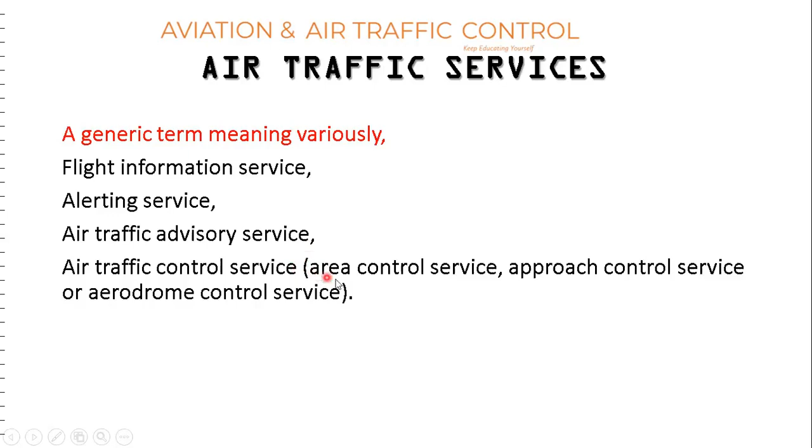This lecture is about air traffic services theory. So air traffic services is a generic term which means variously flight information service, alerting service, air traffic advisory service, air traffic control service. Air traffic control service includes area control service, approach control service, or aerodrome control service.

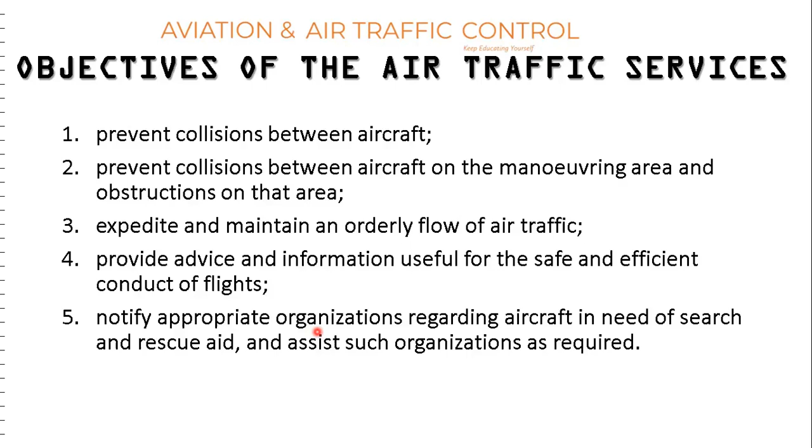So objectives of air traffic services are 5. First is prevent collision between aircraft. Second, prevent collision between aircraft on the maneuvering area and obstructions on that area. Third, expedite and maintain an orderly flow of air traffic. Fourth, provide advice and information useful for safe and efficient conduct of flights. Fifth, notify appropriate organizations regarding aircraft in need of search and rescue aid and assist such organizations as required. So these are 5 objectives of air traffic services.

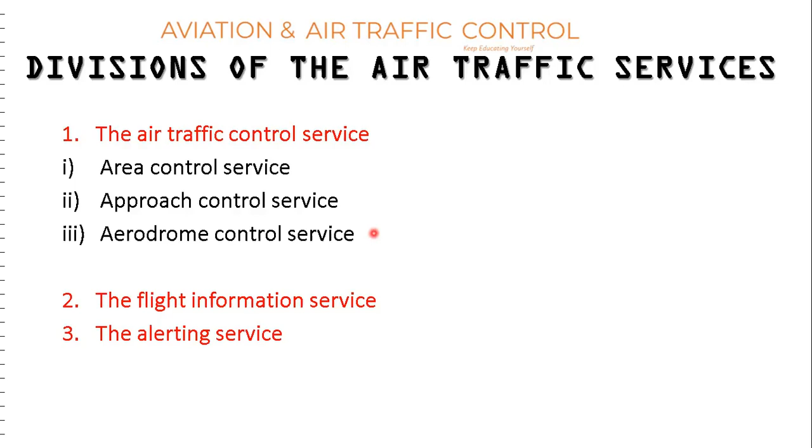So divisions of air traffic services, this is divided into 3. First is the air traffic control service. Air traffic control services are further divided into 3: area control service, approach control service, and aerodrome control service. Then the second division of air traffic services is the flight information service, and the third one is the alerting service.

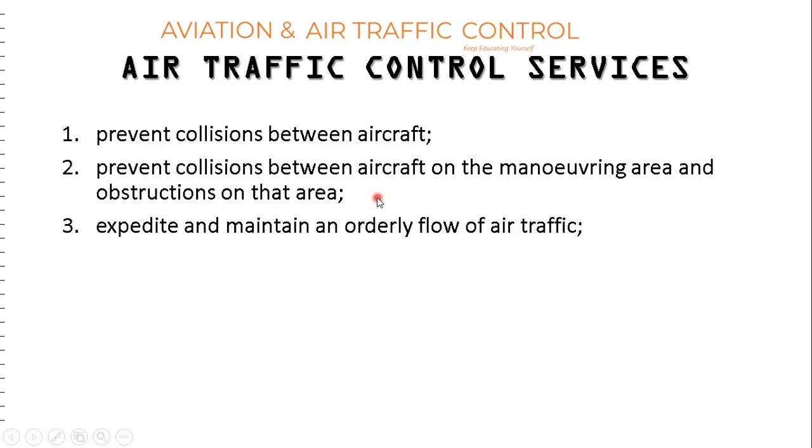So air traffic control service will prevent collision between aircraft. This is their objective. Prevent collision between aircraft on the maneuvering area and obstructions on that area. Expedite and maintain an orderly flow of air traffic. Flight information service will provide advice and information useful for the safe and efficient conduct of flights. Alerting service will notify appropriate organizations regarding aircraft in need of search and rescue aid and assist such organizations as required.

Flight information regions: those portions of the airspace where flight information service and alerting service will be provided shall be designated as FIRs. Control areas and control zones: those portions of the airspace where air traffic control service will be provided to IFR flights shall be designated as control areas or control zones. So here we have spoken about IFR flights. Now we will discuss the VFR flights.

Those portions of controlled airspace wherein it is determined that air traffic control service will also be provided to VFR flights shall be designated as class B, C, or D airspace. Controlled aerodromes: those aerodromes where air traffic control service will be provided to aerodrome traffic shall be designated as controlled aerodromes.

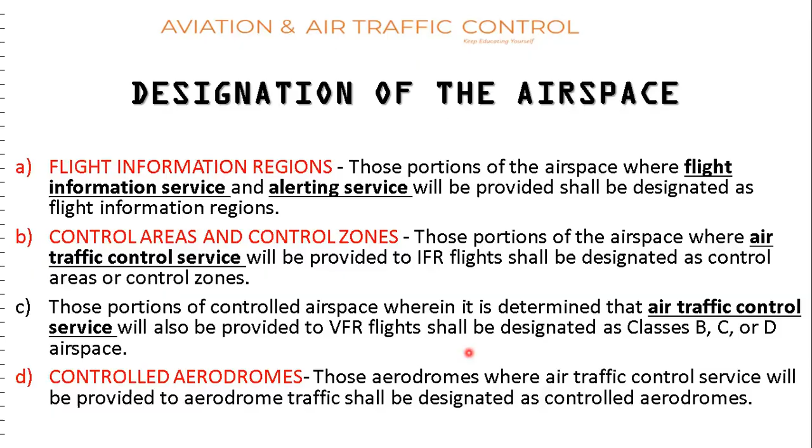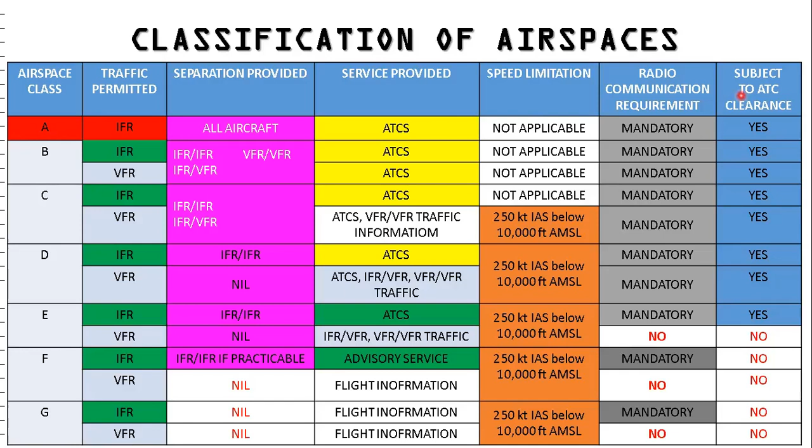Now, this is the classification of airspace. Classification of airspace as per ICAO has been done in 7 classes, A to G. It is further classified based upon traffic permitted, separation provided, services like air traffic control service, traffic information or alerting advisory service, then speed limitation, radio communication requirement, and whether these flights are subject to ATC clearance in a particular airspace or not. For this, you can refer to our separate video.

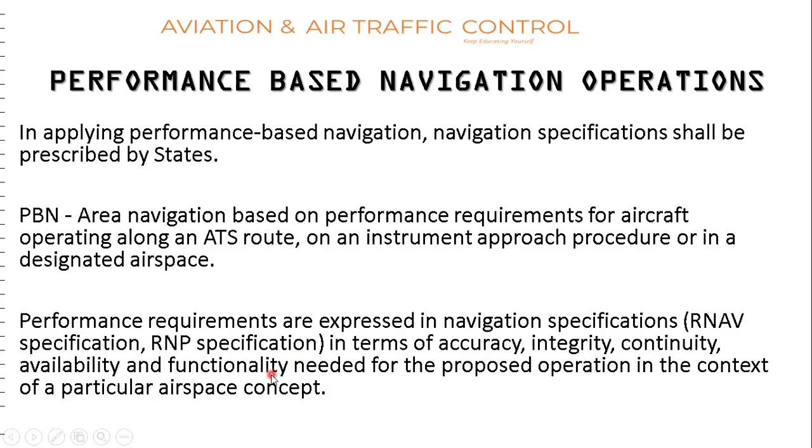Now, performance-based navigation operation. Every state has to prescribe what performance-based navigation they are utilizing in their airspace. So what is PBN? PBN is area navigation based on performance requirements for aircraft operating along an ATS route, on an instrument approach, or in a designated airspace. Performance requirements are expressed in navigation specifications. These are of 2 types, RNAV specifications and RNP specifications. Performance should be described in terms of accuracy, integrity, continuity, availability, and functionality for a particular airspace concept.

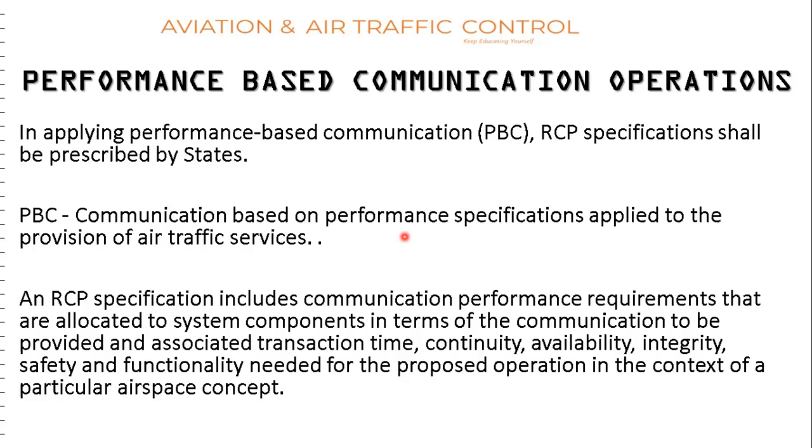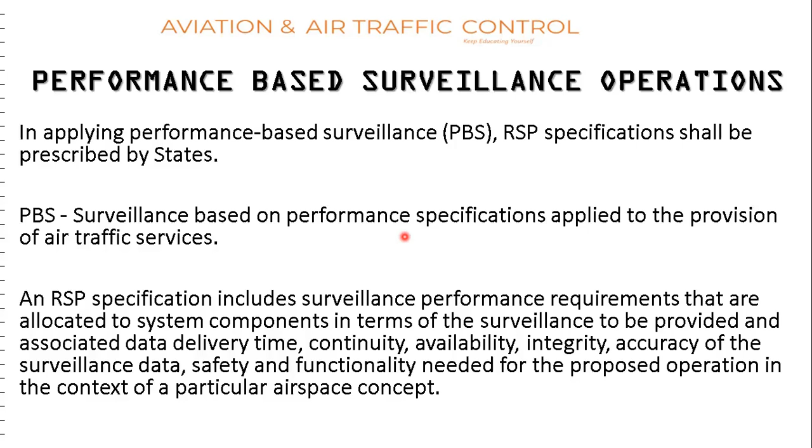Then performance-based surveillance operations. In applying performance-based surveillance, RSP specifications shall be prescribed by states. So what is performance-based surveillance? This is surveillance based on performance specifications applied to the provision of air traffic services. And required surveillance performance specifications include surveillance performance requirements that are allocated to system components in terms of the surveillance to be provided and associated data delivery time. In communication it was transaction time; here it is data delivery time. Thereafter, continuity, availability, integrity, accuracy of surveillance data, safety and functionality needed for the proposed operation in the context of a particular airspace concept.

Designation of the units providing air traffic services. First is flight information center. Second is area control center. Third is approach control center. Fourth is aerodrome control tower. Aerodrome control is further divided into three parts: aerodrome control tower, ground control, and clearance delivery.

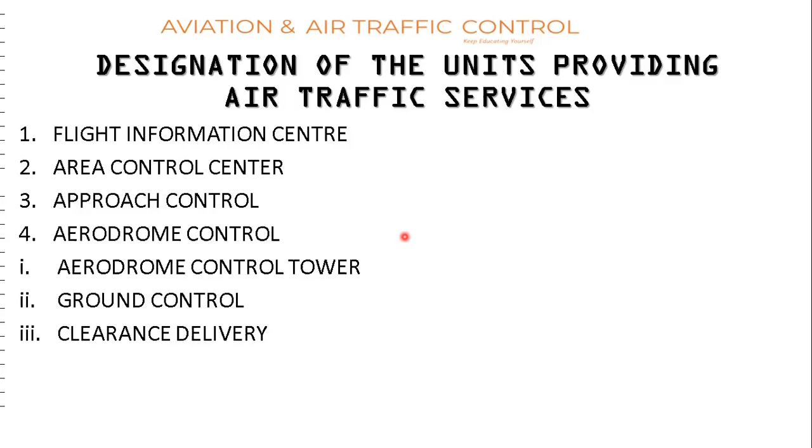Specification for flight information regions. So FIR is an airspace of defined dimension within which flight information service and alerting services are provided. Flight information regions shall be delineated to cover the whole of the air route structure to be served by such regions within its lateral and vertical limits.

Where FIR is limited by an upper FIR, the lower limit specified for the upper FIR shall constitute the upper vertical limit of the FIR. It means that both levels, the upper limit of the lower FIR and the lower limit of the upper FIR, should coincide. And those shall coincide with a VFR cruising level.

So suppose lower FIR is up to 245, it's a lower FIR. So upper FIR will start from 245 and above. So here, up to 245, one unit is responsible, and above that the upper FIR is responsible. And when we will be allocating levels, no 500 feet levels will be allocated to anyone.

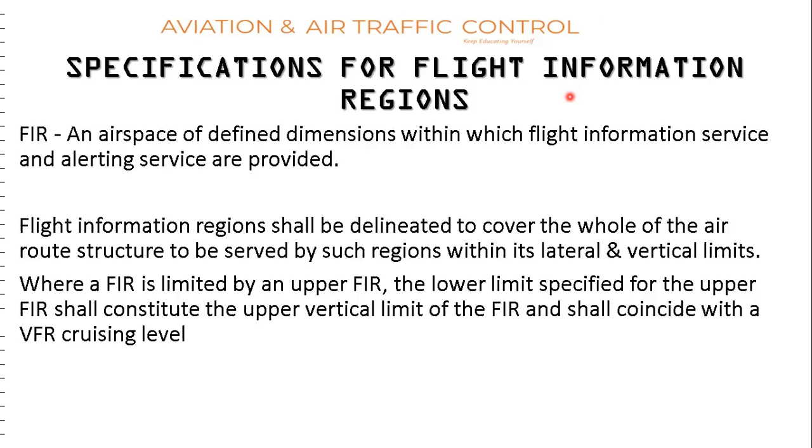We will be allocating like 200, 210, 220, 230, 240. So up to 240, it will be the responsibility of lower FIR. And 250, 260, 270 will automatically come into the jurisdiction of upper FIR. So in these cases, the lower limit of the upper FIR and the upper vertical limit of the lower FIR shall coincide. And that should coincide with a VFR cruising level. So this is a pictorial view of all the FIRs.

Specification for control area. So if we are talking about control area, first of all, we have to understand what exactly it is. It is a controlled airspace extending upward from a specified limit above the earth. So it means it is not starting from ground. It is somewhere above the earth. It is desired to protect the IFR flights. So control areas are basically to protect the IFR flights which are subject to the provision of air traffic control services.

So one thing we have understood from the definition is that it will not start from the ground. From ground, what will start? That is control zone, which we will discuss next. So here, what should be the lower limit of control area? If we have to establish a control area, there will be a lower limit and an upper limit. A lower limit of a control area shall be established at a height above the ground or water of not less than 700 feet. So it should be at least 700 feet or above.

And when the lower limit of a control area is above 3000 feet mean sea level, it should coincide with a VFR cruising level. So suppose if it is above 3000 feet, you have to give the lower limit like 3500 feet, 5500 feet, 6500 feet, 75, 85, 95. So these levels will be the lower limit of control areas. The lower limit of a control area should, when practicable and desirable, be set so that VFR flights have a freedom to operate below this control area.

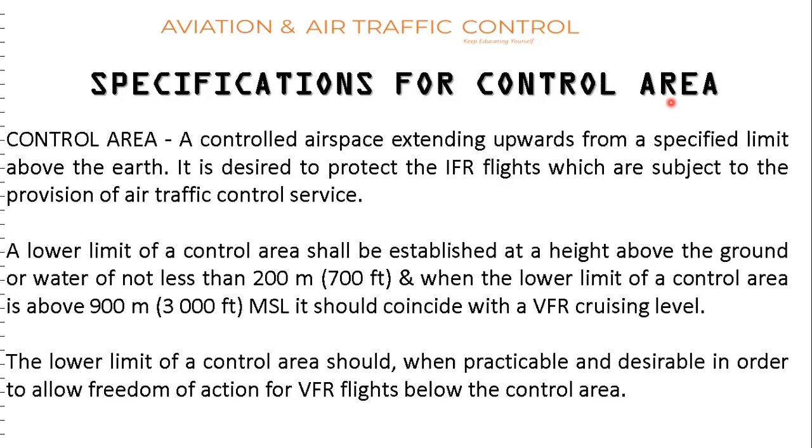Now, control zone. We have already understood control area, which starts from a certain height not less than 700 feet. Control zone is a controlled airspace extending upwards from the surface of the earth to a specified upper limit. The lateral limits of control zone shall encompass at least those portions of the airspace which are not within control areas and containing the paths of IFR flights arriving at and departing from aerodromes to be used under IMC. So it will protect the flights operating near an aerodrome from VFR flights.

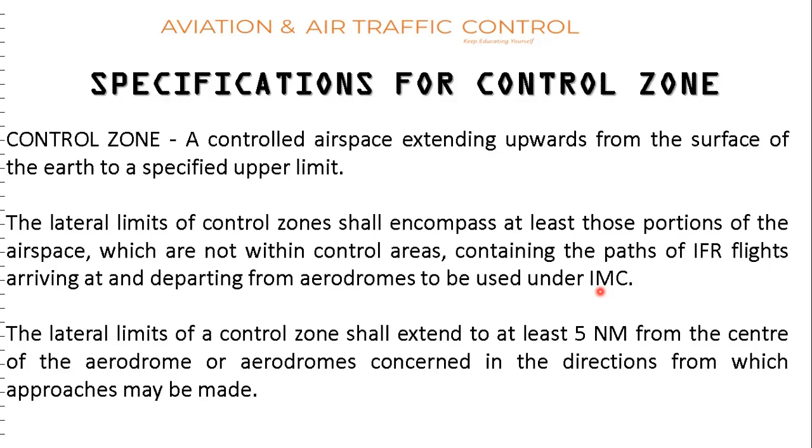So what should be the lateral limits of control zone? Minimum should be 5 nautical miles. It should not be less than this, from the center of the aerodrome or aerodromes concerned in the direction from which approaches may be made. So minimum 5 nautical mile lateral limit of control zone is mandatory.

Now, if a control zone is located within the lateral limits of a control area, lower will be control zone, upper will be control area. So it shall extend upwards from the surface of the earth, and up to the lower limit of the control area. Again, as we discussed earlier, as per Appendix 3 to Annex 2, if this limit is 3000 feet mean sea level or above, we have to use VFR cruising levels for this upper level.

So suppose from ground to 5500 feet we have a control zone. 5500 is above 3000 feet and is a VFR level. So we will make the VFR level allocation for the upper limit of control zone, and from 5500 feet and above, the control area will start. If it is desired to establish the upper limit of a control zone at a level higher than the lower limit of a control area established above it, or if the control zone is located outside the lateral limits of a control area, its upper limit should be established at a level which can easily be identified by pilots.

So it is saying that there should be no ambiguity. Pilot should be aware of it, that here the control zone is starting. So there is one more interesting fact which you will get from the definition of the control zone. If we are talking about the control zones, the QNH below transition level, when it will be going to descend and it will be going to set QNH, so it is applicable in control zones only.

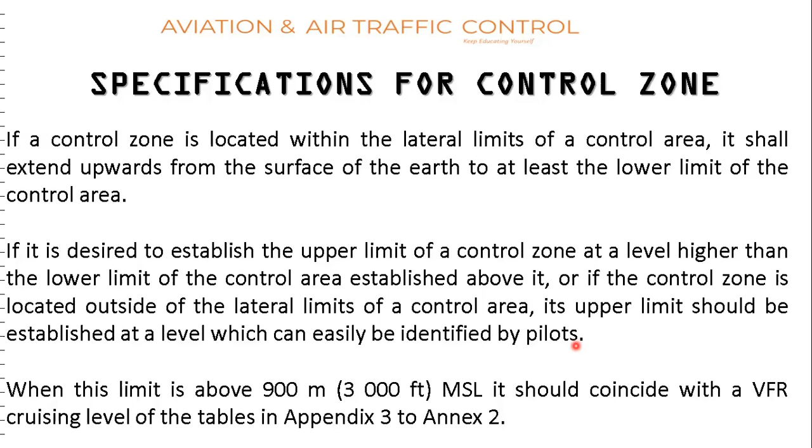And control zones, sometimes they are making it 25 nautical miles, sometimes they are making it 30 nautical miles. But the minimum should be 5 nautical miles from the center of the aerodrome or from the direction of the approach. So this is the main purpose. Control zone is to protect, like all your instrument approaches will be a part of control zone, or your holdings over the facility which is going to provide you aid for landing or departure will be contained in this one. SIDs and STARs will also be a part of this one.

Now, identification of air traffic service units and airspace. So how you will identify in which airspace you are and which air traffic service unit is operating in that one. So here it has been given like this. An area control center or flight information center should be identified by the name of a nearby town or city or geographic feature. So if you are going towards any particular airport, like this is Bangalore area, or this is Kolkata flight information region. So like this, they have to specify. So it will be easy for the pilot to identify at which area control center they are, in which airspace they are operating.

An aerodrome control tower or approach control unit should be identified by the name of the aerodrome at which it is located, London Tower, Heathrow Tower, like this. A control zone, control area or flight information region should be identified by the name of the unit having jurisdiction over such airspace. So it's just for the identification.

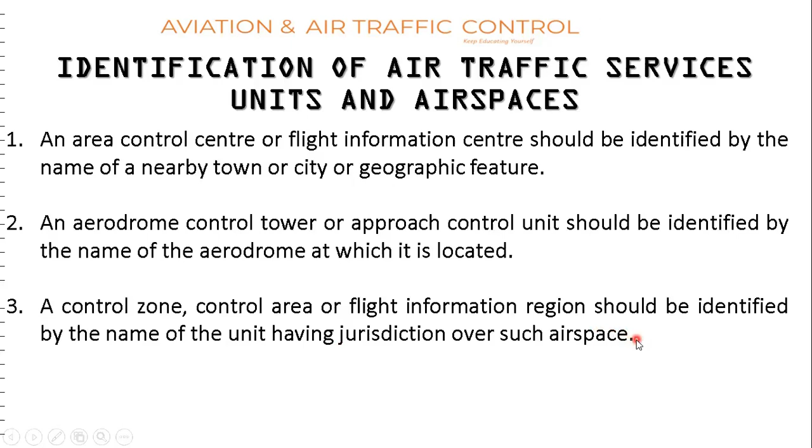Now, how establishment and identification of ATS routes have been done? So routes have been divided into 4 groups, and one group is A, B, G, R. These are non-RNAV routes and regional network of ATS routes. So you can say it's non-RNAV, so these are old routes and used for international. L, M, N, P, these are RNAV routes, point-to-point flying is possible, and these are a part of the regional network of ATS routes, means international routes.

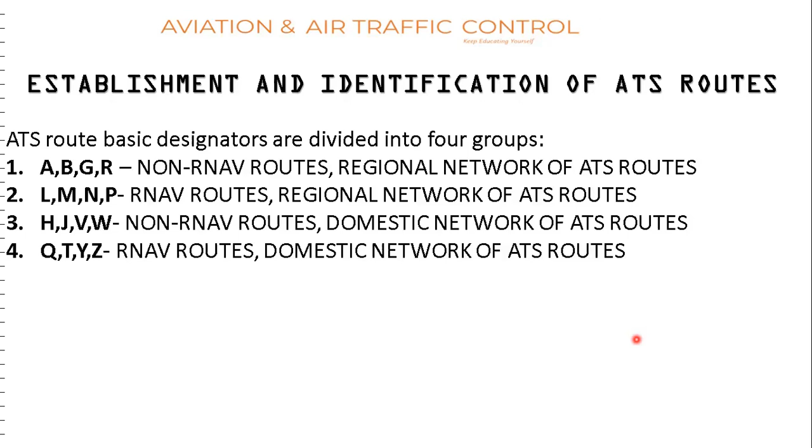Hotel, Juliet, Victor, Whiskey, these are non-RNAV routes and domestic network of ATS routes. So any state or country will prepare routes of H, J, V, W. They will be used for their domestic legs. Q, T, Y, Z, these are RNAV routes, but these are also used for the domestic legs only. Now, if we have to supplement some letter, it can be prefixed or suffixed. First, we will talk about the prefix, what we can add to the ATS route as a prefix. So the basic designator we have already discussed. There are 4 types. Now, to those 4, we can add some letter as a prefix.

So K, U, S. K is copter, U is upper, S is supersonic. As the name says, K indicates a low-level route established for use primarily by helicopters. U is the route or portion established in the upper airspace. S are the routes established exclusively for use by supersonic aircraft during acceleration, deceleration, and while in supersonic flight.

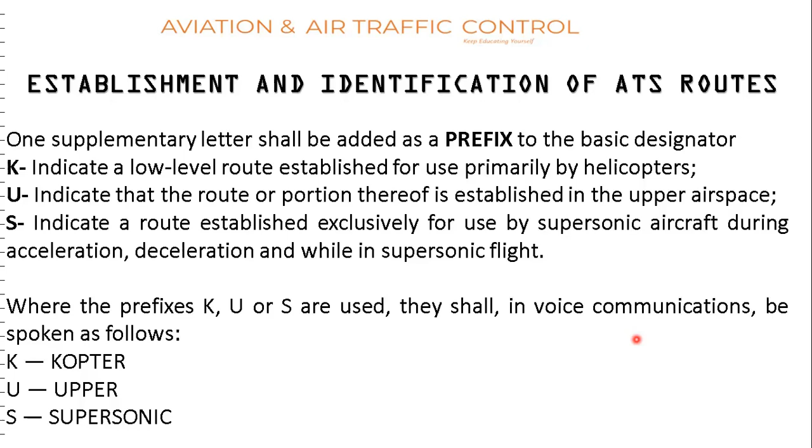Now we have talked about the prefix. Now we will talk about the suffix. So basic designators are 4, out of which any one will be used. Prefixes we have already discussed, there are 3. Then one supplementary letter may be added after the basic designator of the ATS route. It can be F or G, Foxtrot or Golf. If you are putting Foxtrot, it means this is a route where advisory service only will be provided. If you are putting Golf, it means that we will be going to receive only flight information service.

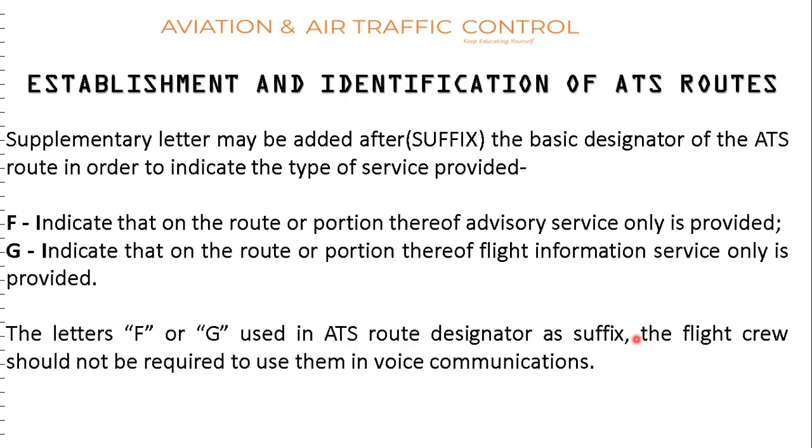So the ATS route designator shall consist of prefix K, U, S, copter, upper, supersonic. Then basic designator letters are A, B, G, R, L, M, N, P, H, J, V, W, Q, T, Y, Z, followed by a number from 1 to 999. Suffix can be Foxtrot and Golf. So the number of characters required to compose any ATS route designator shall not exceed 6 characters. So whenever you see your charts, you will find that any ATS route will not exceed 6 characters. Maximum permitted is 6 characters only.

I have taken a few examples. Upper N571 route, G473, J1. So the maximum number you can use is 999, these 3 digits. So here 473. You cannot have a route like this, G4739. It is exceeding the limit. You can have only up to 3 numbers.

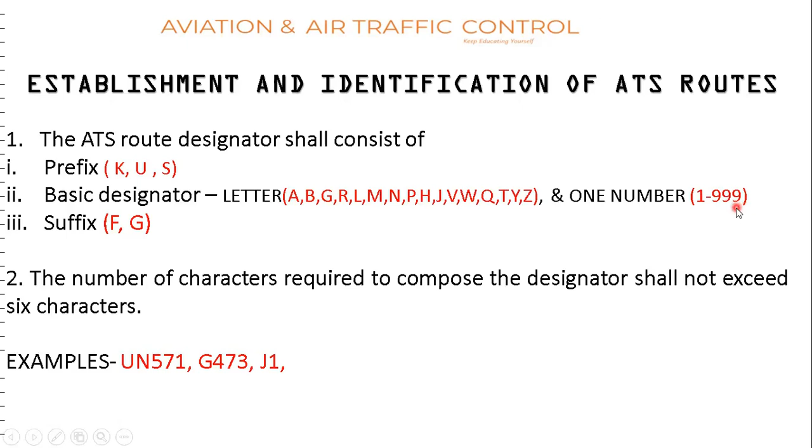Next, minimum flight altitudes. Minimum flight altitude shall be determined and promulgated by each contracting state for each ATS route and control area over its territory. So it will be published in the AIP en route section.

The minimum flight altitudes determined shall provide a minimum clearance above the controlling obstacle located within the areas concerned. So from the obstacle, it should be 1000 feet above. This is the obstacle, so you see this is 1000 feet above. So it will be published in minimum flight altitude.

If it is in a mountainous region, the minimum required is 2000 feet. So they will do an air survey. Based upon that, they will find out the highest obstacle in this area, and above 2000 feet, they will establish minimum flight altitudes.

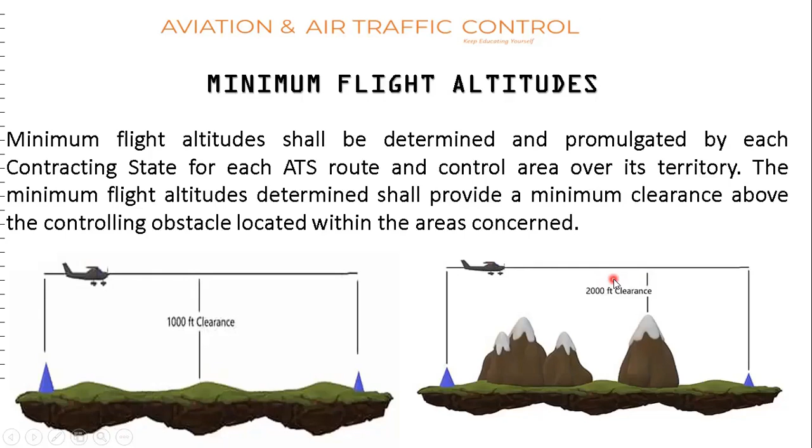To indicate the state of emergency, aircraft might operate the equipment as follows. They will set transponder code 7500, 7600, 7700. And if they are using ADS-B or ADS-C, they will use appropriate emergency signals, and they can transmit the appropriate emergency messages via CPDLC also.

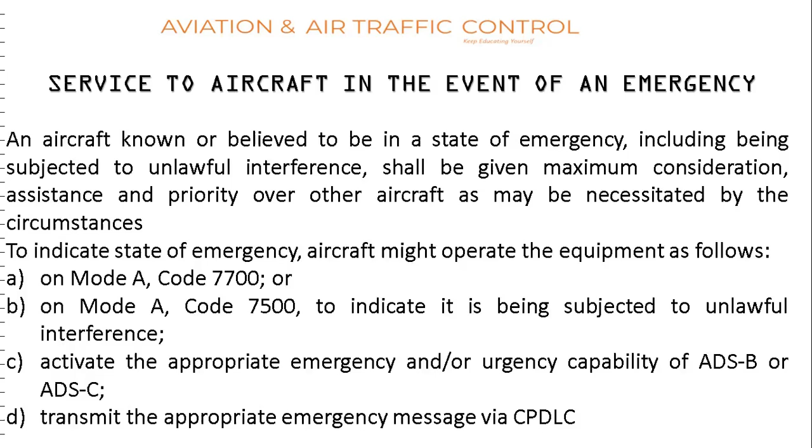In-flight contingencies. An aircraft known or believed to be in a state of emergency, including being subjected to unlawful interference, shall be given maximum consideration, assistance and priority by the air traffic service providers over other aircraft as may be necessitated by the circumstances. So distress is a condition of being threatened by serious and/or imminent danger and of requiring immediate assistance. Mayday, mayday, mayday is a part of this one.

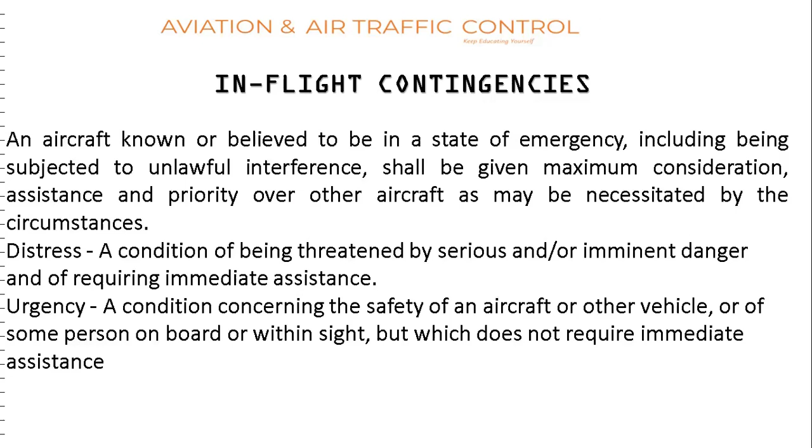Urgency is a condition concerning the safety of an aircraft or other vehicle or of some person on board or within sight, but which does not require immediate assistance. So it may develop into distress. So they will say requesting priority landing for reasons so and so.

So to indicate the state of emergency, aircraft might operate the equipment as follows. They will set transponder code 7500 for unlawful interference, 7600 for radio failure, 7700 for emergency conditions, 7000 for VFR, it's a conspicuity code, and 2000 if you have not received any transponder code and you are operating in a controlled airspace. When you are in contact with the ATS unit, you will ask for the squawk code. They will allocate you a new code.

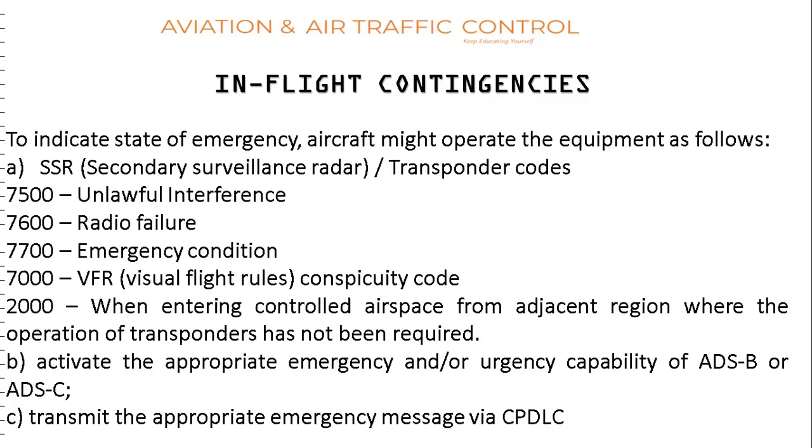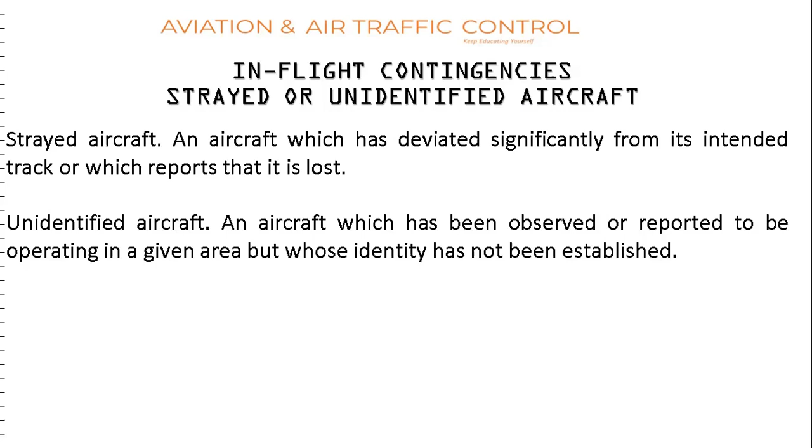Activate the appropriate emergency or urgency capability of ADS-B or ADS-C as we have discussed earlier, and they can transmit emergency messages on CPDLC. So in-flight contingency: strayed or unidentified aircraft. So what is a strayed aircraft? A strayed aircraft is one which has deviated significantly from its intended track, and/or reports that it is lost. An unidentified aircraft is an aircraft which has been observed or reported to be operating in a given area, but whose identity has not been established. So it is not lost, but the service providers are not aware of its identity.

So actions by air traffic service units in these cases: attempt to establish two-way communication with the intercepted aircraft, including on the emergency frequency, which is 121.5. So they will try to communicate with the intercepted aircraft on the emergency frequency also. Thereafter, the air traffic controller will inform the pilot of the intercepted aircraft that it has been intercepted.

Then establish contact with the intercept control unit, maintaining two-way communication with the intercepting aircraft, and provide the available information concerning the aircraft. So the air traffic controller will provide whatever useful information he has about that aircraft to the unit which intercepted it, so that it will help them to identify that it's not a threat. Relay messages between the intercepting aircraft or the intercept control unit and the intercepted aircraft as necessary. There are some SOPs made for this, which will be followed locally.

So ATC will, in close coordination with the intercept control unit, take all necessary steps to ensure the safety of the intercepted aircraft. So safety is a prime concern. Even in interception, they will give priority to this, so that safety is not infringed.

Inform the ATS unit serving adjacent flight information regions if it appears that the aircraft has strayed from such adjacent flight information regions. So sometimes they may deviate. It happens during bad weather; they deviate significantly from their track, or during training, a pilot may deviate from his path significantly. So if one ATS unit is aware, it will inform the adjacent flight information region that this aircraft has strayed.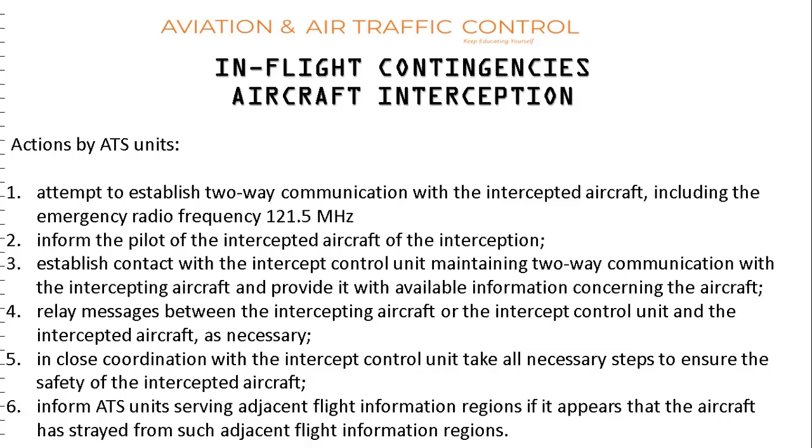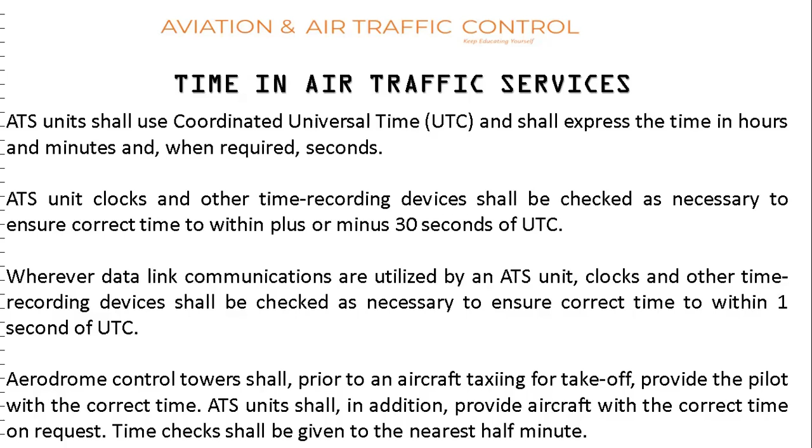The aerodrome control tower shall, prior to an aircraft taxiing for takeoff, provide the pilot with the correct time. So this is mandatory for all aerodrome control towers. This will be done by the surface movement controller basically. ATS units shall in addition provide aircraft with the correct time on request. Time checks shall be given to the nearest half minute only.